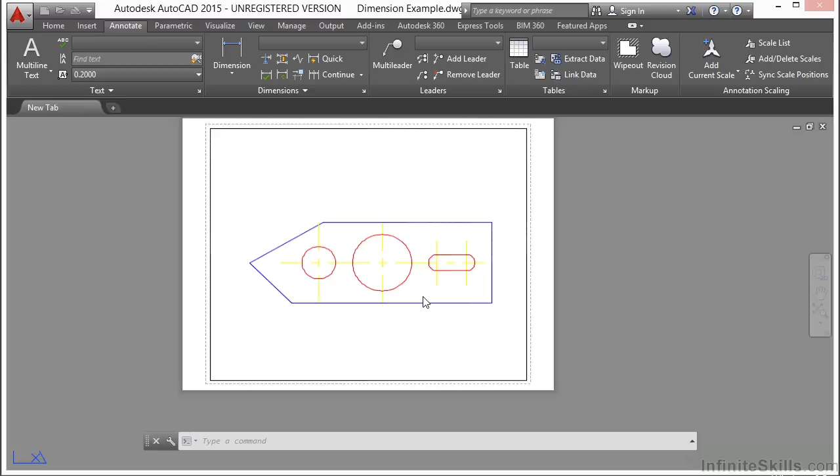Browse to this chapter's folder and look for the dimensionexample.dwg file and open it up. Go to the Dimension tab.

Now here we have several different dimensions already put in here. You can make changes to dimensions through the Properties panel. You can open that up by pressing the Control key and the number 1 key at the same time. If you want to change the text value, double-click the text, and that will open it up in a text editor. You'll have what looks like your multi-line text editor contextual ribbon right up here, so you can get access to your justification, your fonts, your colors, bold, italicized, etc.

You can even match properties inside the text editor. You can change your text style, or you can type things in. So let's say that we need to represent this not with the measurement, but with some actual words.

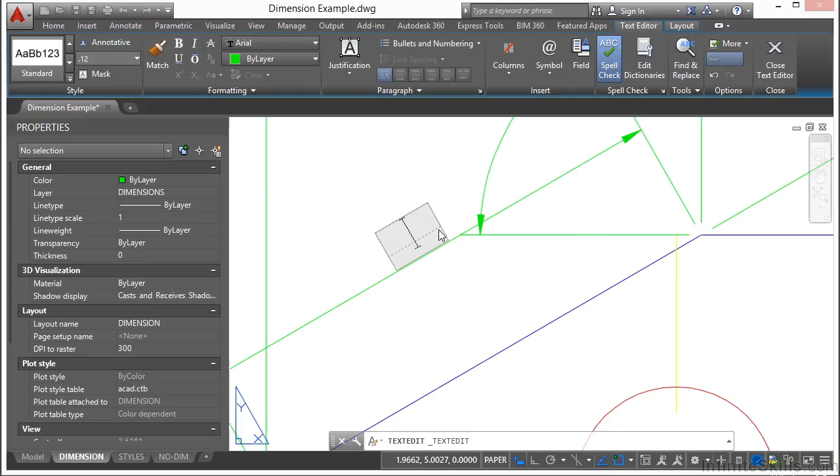You just select that text object there and press the delete key or backspace. That will erase that, and then you can type in anything else. I'm just going to type in something simple: Side view. If you press enter, it carriages down to another line. So what you want to do is just click somewhere outside of that text, and there is your text.

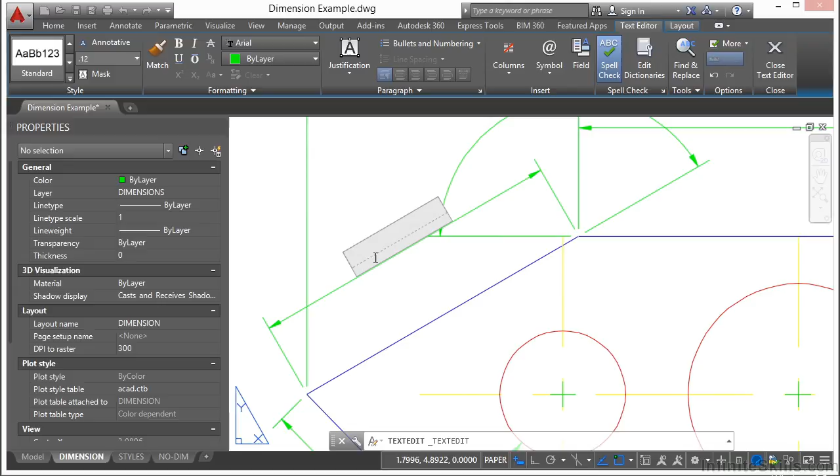You can override that quite easily. So double click the text, and this works just like a regular text editor. You can move with your arrows, you can delete, and if you want your measurement value back, you type in less than and then greater than, and it puts in the actual measurement for you. But you can do all sorts of things, you can type in text just like that.

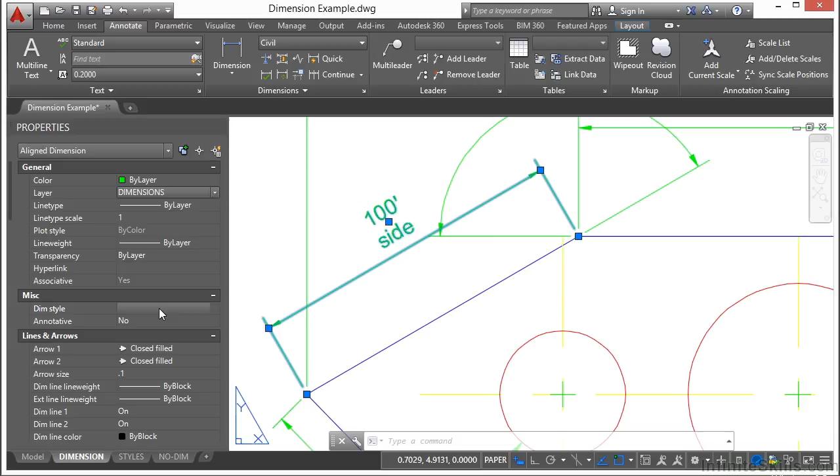Now, if you select your text object and come to the properties palette, you can change the color here, but remember, please don't ever change it to anything else but by layer. You can change what layer it's on if you need to. You can change the line type, all of your regular object selection type styles. Here you can change the different type of style.

If we scroll down, we can override some of the other features here. Now, typically you're not going to want to override any arrows or anything like that, except for very special cases. If you need certain or specific arrowheads, you can do that, though I'd suggest creating a style specifically for that purpose. But you can change some of these objects here.

Just click on them, find the one you want, and it will make it into a dot or an arrow. Now you have an arrow 1 and an arrow 2, just like you'll have a dimension line 1 and dimension line 2, and so on and so forth. All of the items that refer to number 1 are the very first one that you click. So when you create your dimension, wherever I click first will be arrowhead 1, extension line number 1, and my second selection will be number 2.

I'm going to delete this. So if I select my dimension again, and I want to turn off some of my dimension lines, like right here, select it and turn it off. That'll be this left side. Now your dimension line is the line, it's sort of horizontal, it goes from extension line to extension line, it's where the arrowheads go. I can turn them both off if I'd like. That way I have just the text and just the extension lines. It's a rare case that you would want something like that, but you can do it.

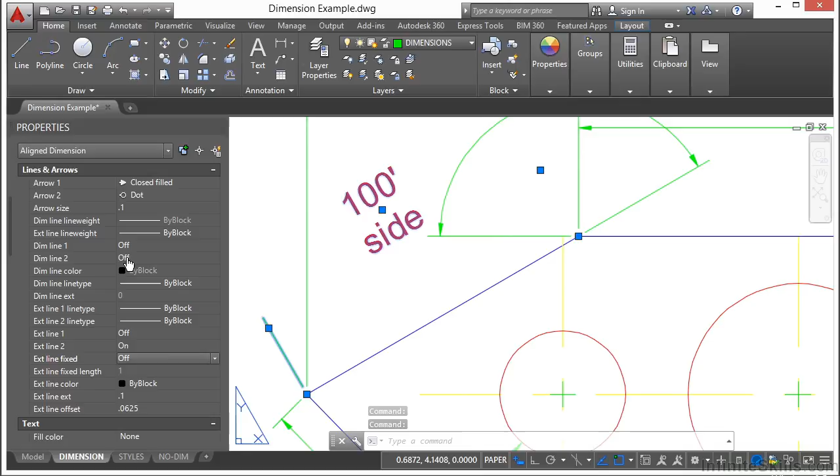Now your extension lines, you can turn off and on as well. Just select it and turn off. And I'm going to turn my dimension lines back on. Sometimes this is something you might want to do: leave your dimension lines on, but turn off your extension lines. So you can see here, there are a lot of different things you can change.

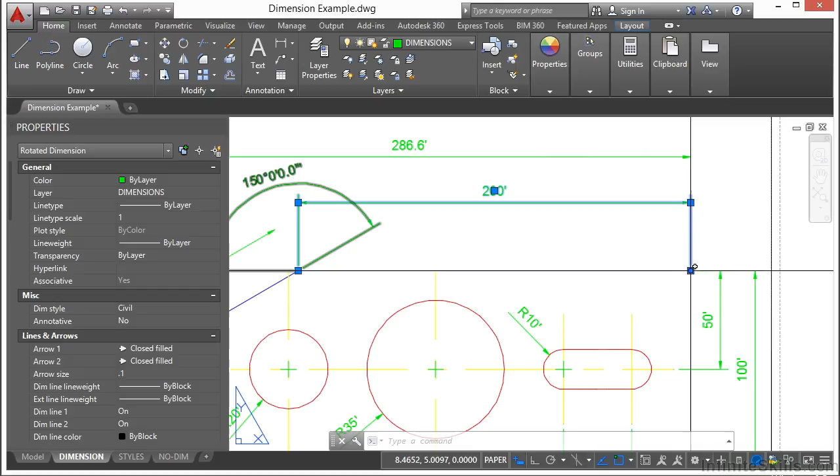You can also grip edit a dimension. So if I select a dimension, you can see I have a couple of different grips here, and each one of them have different things about them, different traits. So if I select this point, this changes where the dimension is, so it's dimensioning to a different spot. So once you move it, then your value will change. So you can change that at any time.

These grips here at the arrowheads will reposition it, up or down like that. And the grip on the text allows you to move it and put it in different locations.

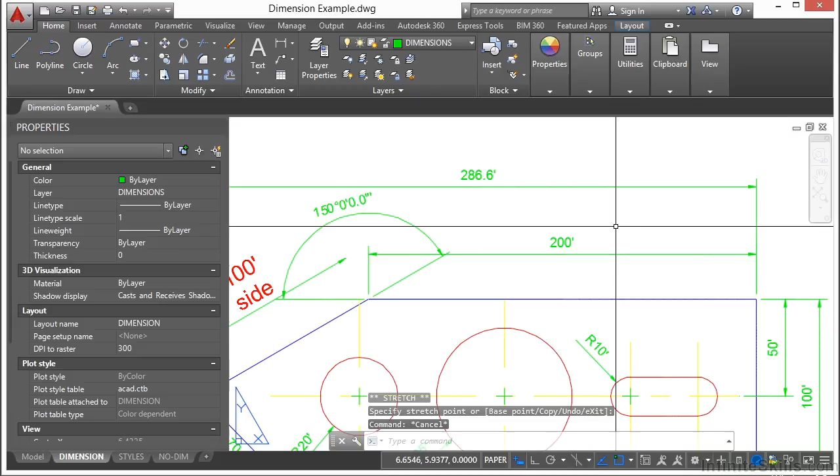Now, if you raise it up or raise it down, your extension lines and dimension lines will follow along with you.

That's a great way to align these and use them the way you want to. There are a lot of other dimension tools on the ribbon. Go to the Annotate tab, and you'll see a lot of different items, with even more at the bottom. Let's go over some of them.

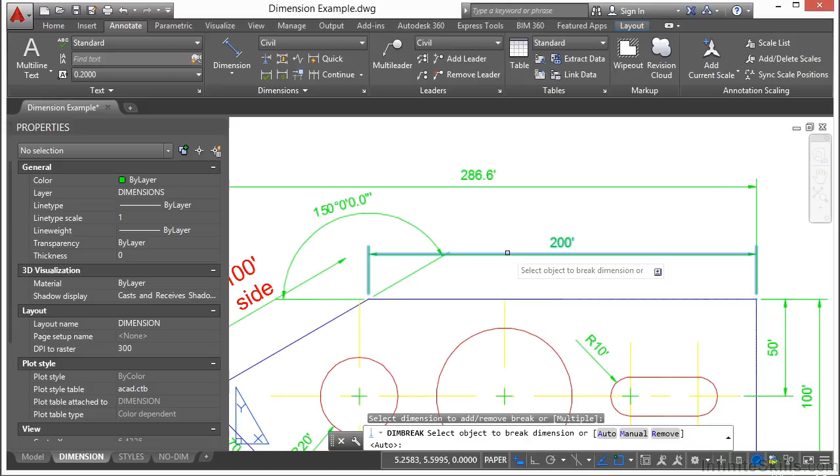This puts a break in your dimension. You select the tool, then follow the on-screen instructions. Select the dimension you want to add a break to, then select the dimension that goes through it, and it will automatically size that for you.

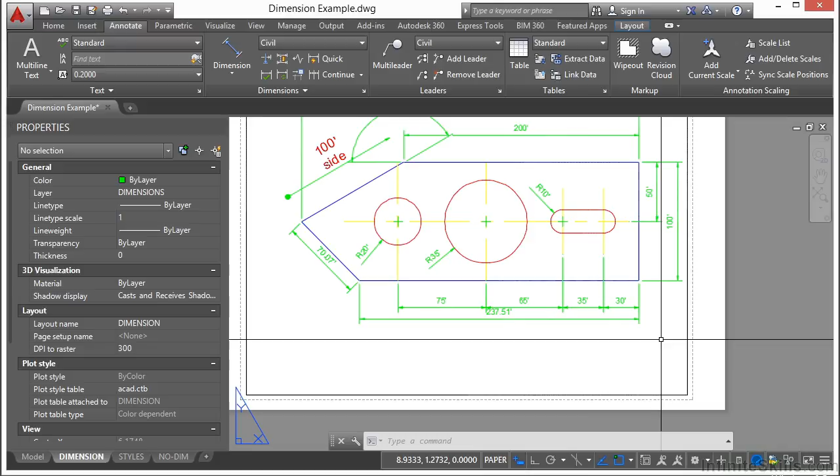That's a nice little feature. Another one you might want to use is adjust space, which adjusts the space between your linear dimensions. If I select the baseline and then select the one to change, right click, I can just choose auto, and it will automatically adjust it to a certain size. This is good if you want a lot of stacked dimensions with the exact same spacing throughout the view. That'll keep your drawing looking nice.

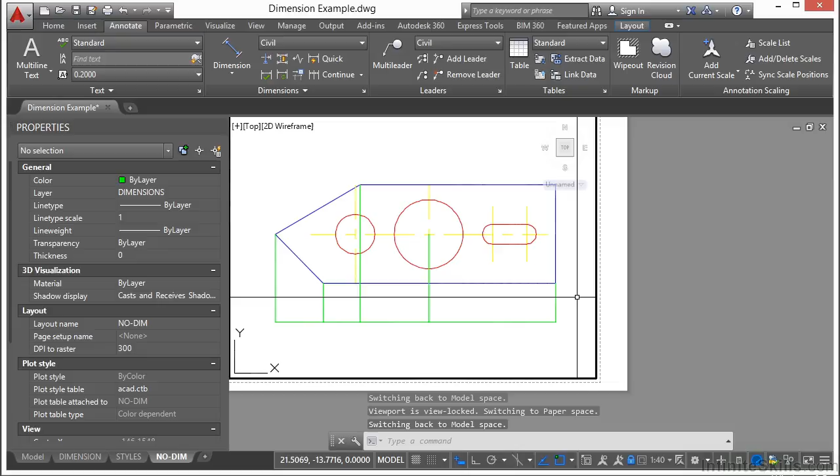This quick tool will draw dimensions very quickly, but you have to be in model space and be able to select. I'm going to select several different items here, and then it does this. Of course it's not to the proper scale since I don't have this set up correctly, but you can see it puts all the dimensions relative to that view in there right away, very quickly. You don't have a lot of control over it, so it's not something I use a lot, but in some mechanical drawings it might help you get a string of dimensions in there very quickly.

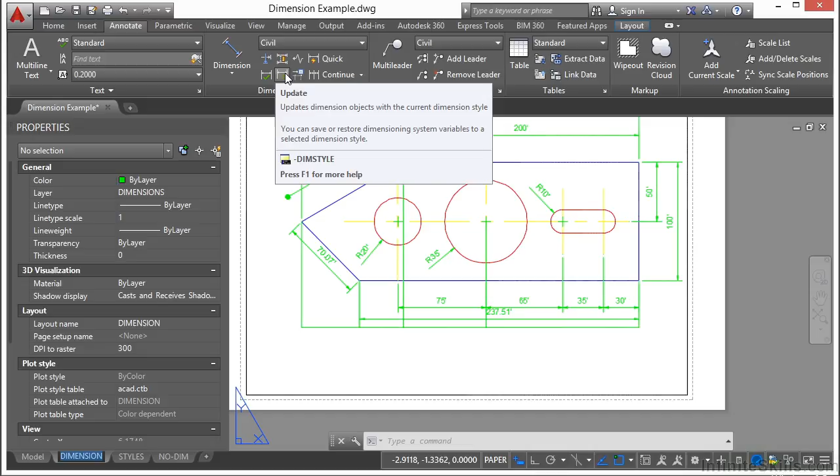This will add inspection symbols to your dimension. This will update your dimensions to a current style. Sometimes dimensions don't update right away if you've changed the style. If you click this tool, then select the dimension object you want to update, then press enter, it will recalibrate that dimension to look like the style it's assigned to. That's a quick way to fix your dimensions if they get messed up.

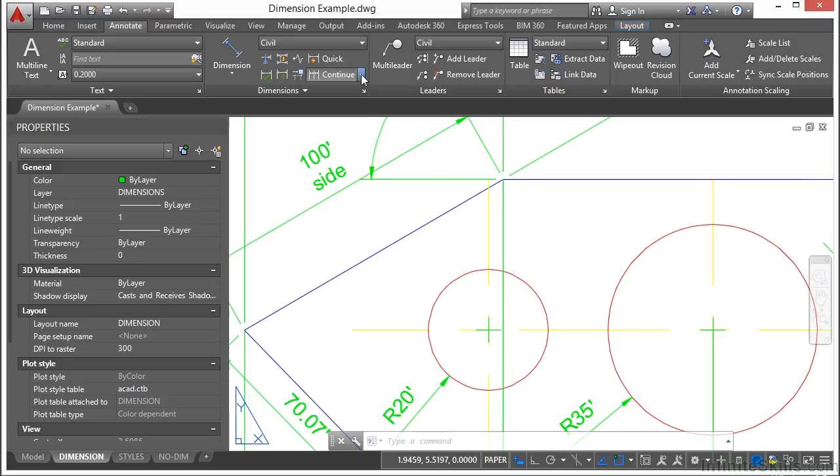This will reassociate dimensions that come off of the wrong points. This is the continue option. I use it often. You have two different types of continues.

So if I go to this dimension style here, I'm going to erase these so they're out of our way. But if I start a dimension here and click on continue, it's going to pick up right where I left off, so I can continue dimensioning. As you see here, it goes on and on.

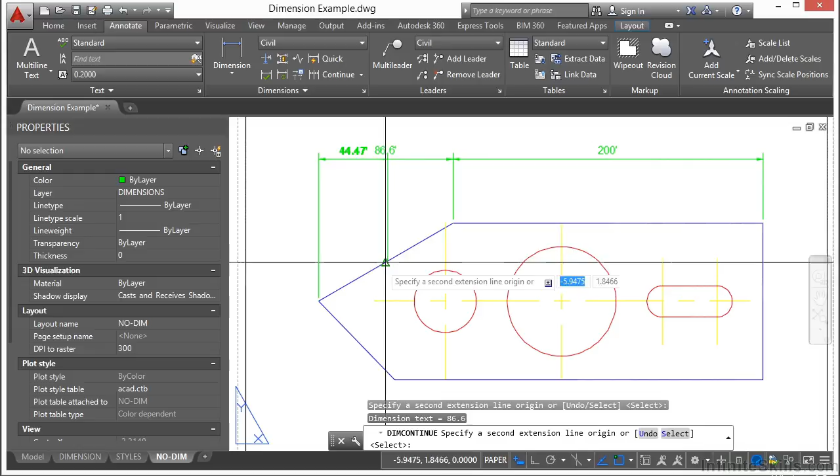Now you can do the linear or you can do stacked and baseline, and it remembers the last one you used. However, if you don't want to use that one, once you start the command, type in the letter S, press enter, and then select the baseline you want to start with. And there you go, they both work the same way.

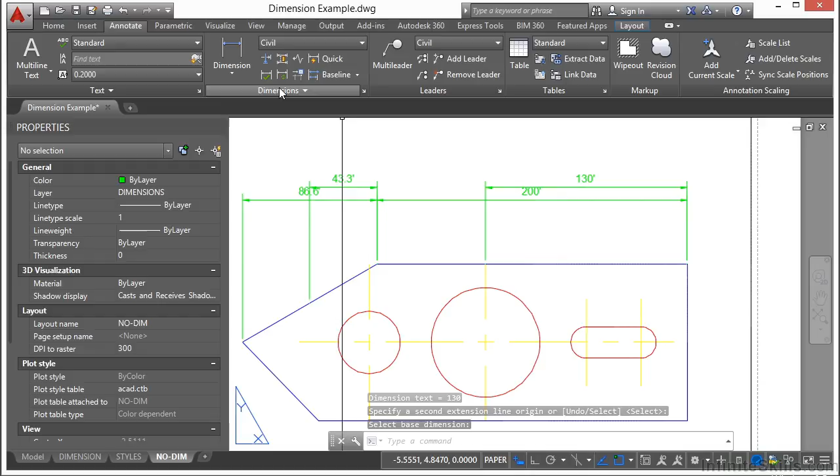There are a few other things in here I really want to show you. I want to show you the jog line. Let's say you want to create a dimension and show a jog in it. Maybe it's an estimated dimension that you're showing off, like an extension. Sometimes we need to put a little jog in our dimension line.

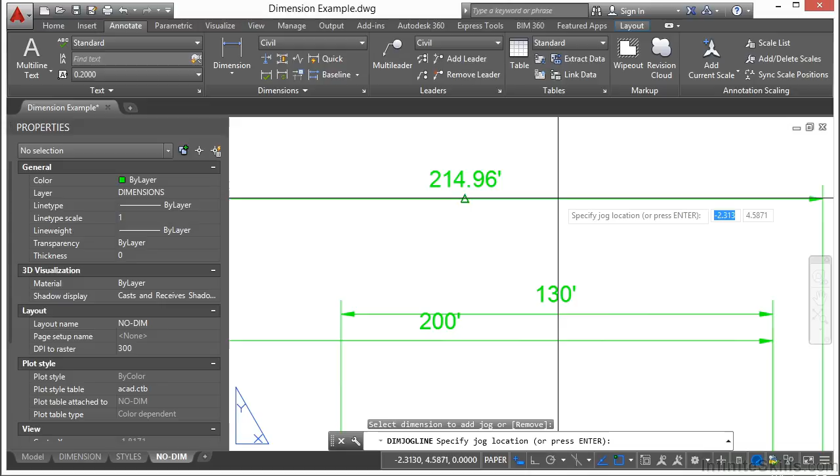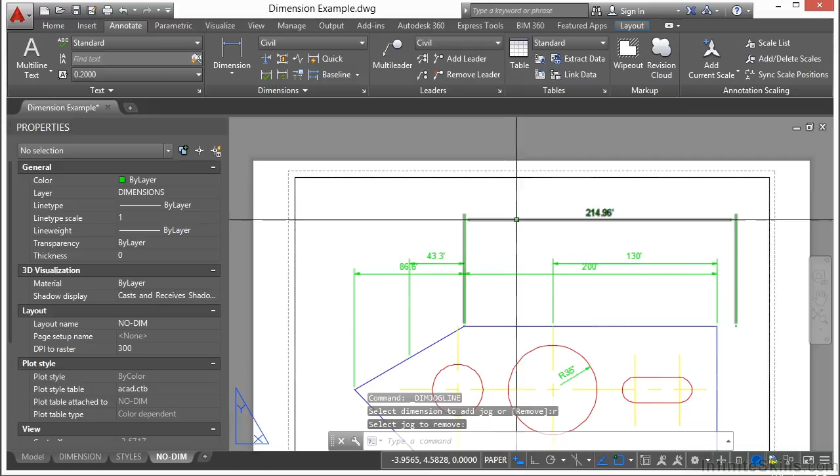You take your dimension, start the dimension jog button, click on it, select your dimension, and press return. That will put your jog right in, and then you can click on it and drag it left or right wherever you want. Now if you want to remove a jog, start the command again, type R for remove, press return, select the dimension, and it goes away. That's a nice little thing you can do.

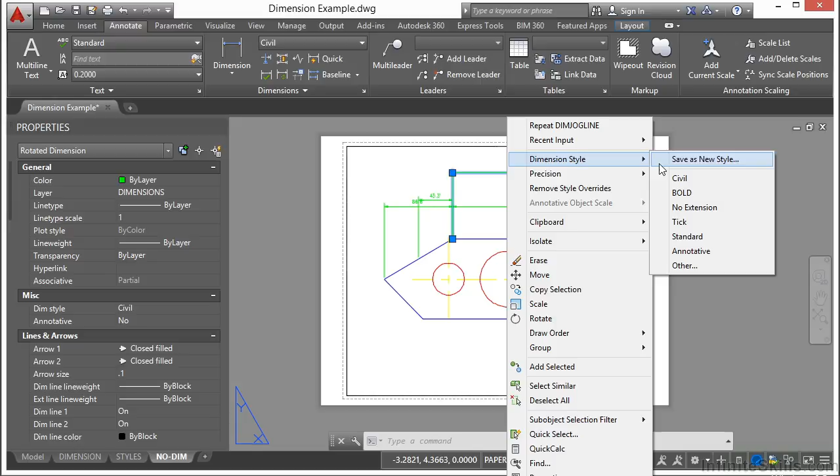Also, if you select a dimension and have your right-click shortcut menus on, you can get to different things like dimension style. You can change the dimension style, or if you've changed the dimension settings some way and want that to be a brand new style, you can click here to save as a new style. You can remove style overrides, and you can change the precision of your dimension so it goes to more or fewer decimal places. So there are a few things you can get to with a select and right click.